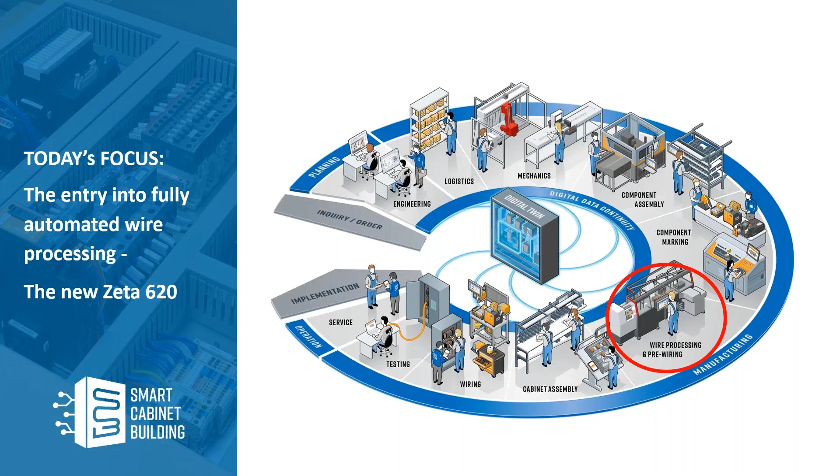In parallel, the wire processing can take place already, and afterwards the cabinet assembly will take place, including the wiring. Once finished, the whole system gets tested and either mounted into your end product or shipped to your customers. So this is the whole cycle of the Smart Cabinet Building offering, and today we will focus on the wire processing, where we have a look at the entry into the fully automated wire processing with the new Zeta 620.

So I would like to cover three topics. First, the question, why do we automate? Then the requirements for automation. And of course, main topic, introduce you to the Zeta 620 and its benefits. So why do our customers automate? There are many different reasons, and one of these might apply to you as well.

First of all, the increasing cost pressure, especially nowadays where raw material and individual parts cost more and more. Your end product will become more costly, and either you have to optimize your process to keep the cost under control, or you have to increase the cost for your customer as well. Then the demand for quality is rising. Customers expect shorter delivery times, or you just need to have short delivery times in your company to meet your production workflow.

Then typically in cabinet building, we look into small batch sizes down to lot size 1. You most commonly have last minute changes, which will show up for whatever reason. And the topic that not just hit the last 2 years, but became even worse: the lack of workers, the lack of skilled workers, to satisfy your production process. Then you may have an increasing requirement for proper and consistent documentation. And finally, the planning cycle becomes more volatile as well.

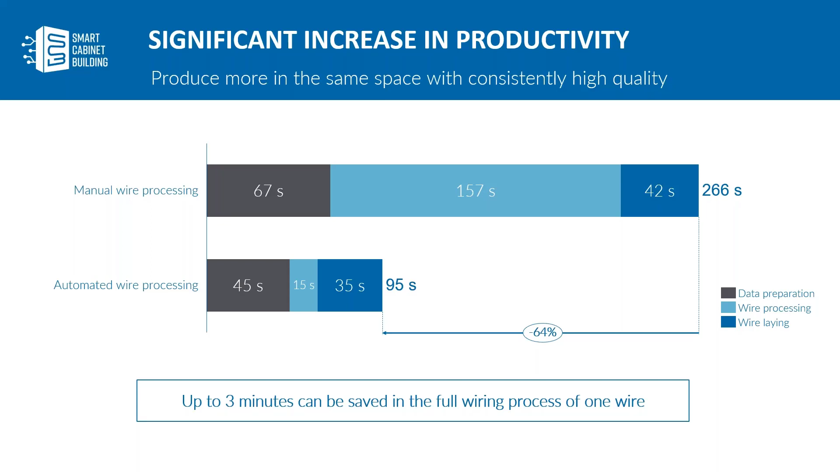So what are the requirements for automation? There are several topics. We will look especially into two main topics here. The first one is standardization of wires and terminals. If you have a wide range of different terminals, length of ferrules, etc., it will become more difficult to automate everything you need. You can reduce the variety of wire types, maybe even cross sections or colors in use. Whatever can be simplified, we can increase the automation level and therefore decrease the cost again. We'll look into such a topic afterwards again.

Second point is the digital data preparation. With a full digital twin that provides all the data you see on the right, describing the required wire production, so including the wire end process, the wire type, cross-section and color, the length of the wire, and the source and destination labeling. With this data, we can already start the automatic production.

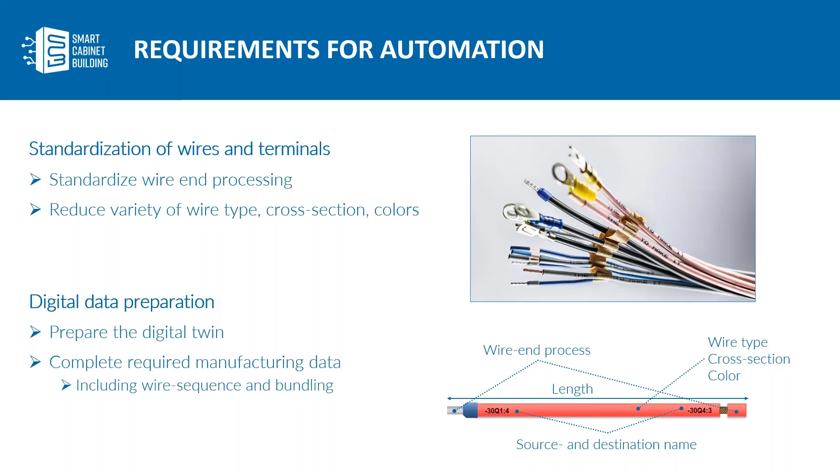This data preparation can be achieved basically with two different approaches. First of all, you use a full ECAD system that is drawing the whole cabinet in 3D and does a virtual wiring, including the evaluation of the wire length. Or a little bit simpler solution, Komax is providing a digital lean wiring software which allows you to do a virtual wiring on a 2D mechanical drawing, and with this evaluating the wire length and preparing the full set of production data. So with this data prepared, we can now look into the new Zeta 620.

With the Zeta 620, you can easily prepare complex orders with a routing optimized sequence of wires. Each wire is pre-labeled, and with this you get a high profitability even with small quantities. The machine comes in a compact and fully integrated design that most probably fits in your location as well.

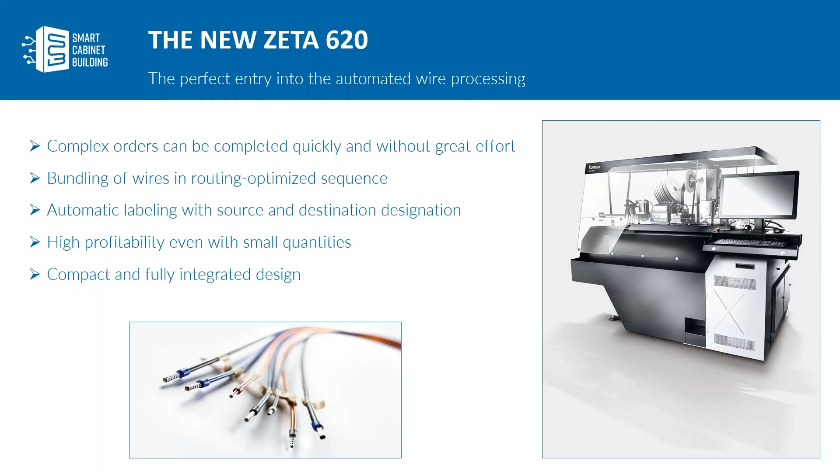The machine supports a cross-section range from 0.5 to 6 square millimeters, or AWG 20 to AWG 10. The machine can load up to 24 different wires, which are then available for processing at any time. So let's look into a few dedicated topics. First of which is the wire end processing.

The most common option in cabinet building are ferrules, where we offer modules to cover the full cross-section range from 0.5 to 6 square millimeters in a fully automatic crimp process. Second one is ultrasonic welding with a high reliability and flexibility, where we can provide welding length of 5 to 19 millimeters.

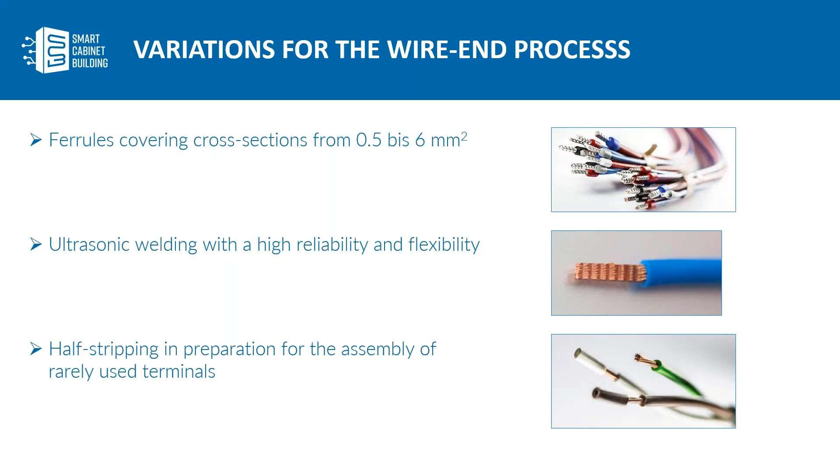And last but not least, we have a half stripping option on this machine as well. This can either be used in situations where you don't need any wire end processing at all, or if you want to crimp some rarely used terminals, like for example, a ring terminal on a ground wire. And this could then be just a manual step after the fully automatic preparation of the bundles. So these are actually the three options the machine will cover.

Another very important topic is the clear labeling of each wire with the source and destination name. This can be done either with inkjet marking with two printers, typically in white and black color for best readability, and this offers continuous printing as well, which will be very helpful, for example, when troubleshooting certain errors in your cabinet.

So to show a bit more about the machine, I would like to run a quick video which gives a good impression of how this machine will work. Please give me a second.

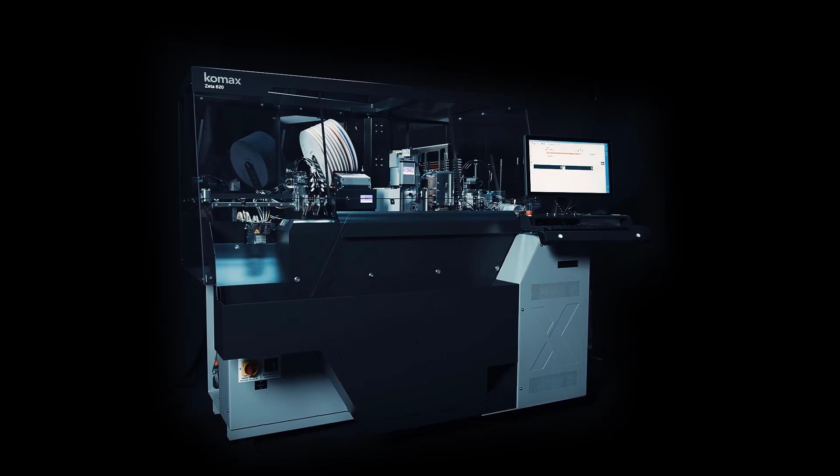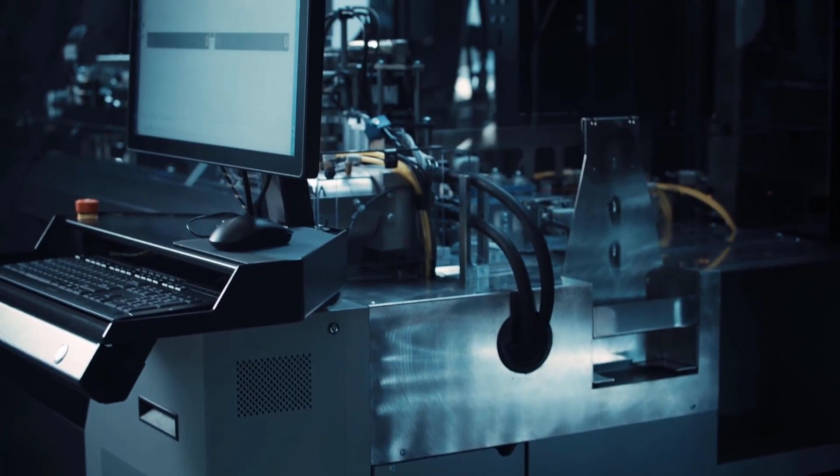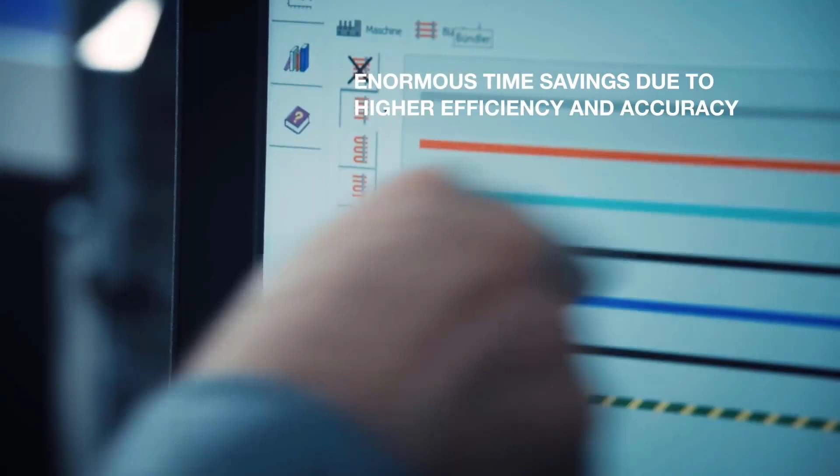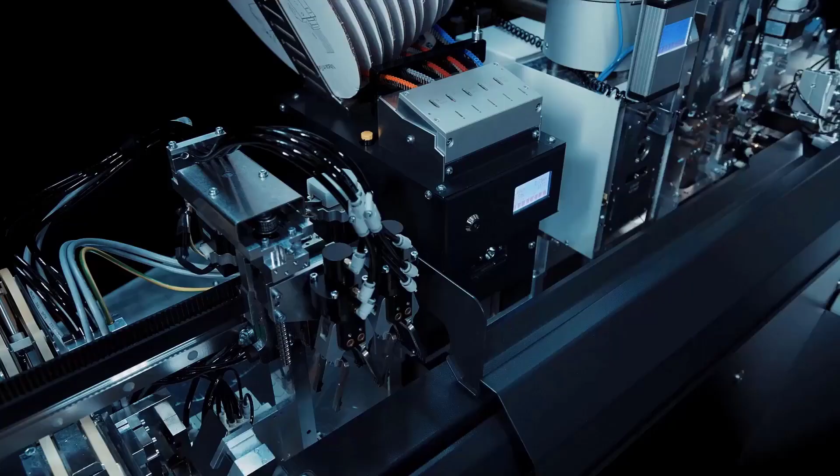So here you can see the Zeta 620 with the integrated printers. So compared to your machines, we don't need extra floor space anymore. So they are nicely integrated. The user interface itself is well known and well received by customers. It's the same as other Zeta family members provide as well. The automatic wire selector can load up to 24 wires.

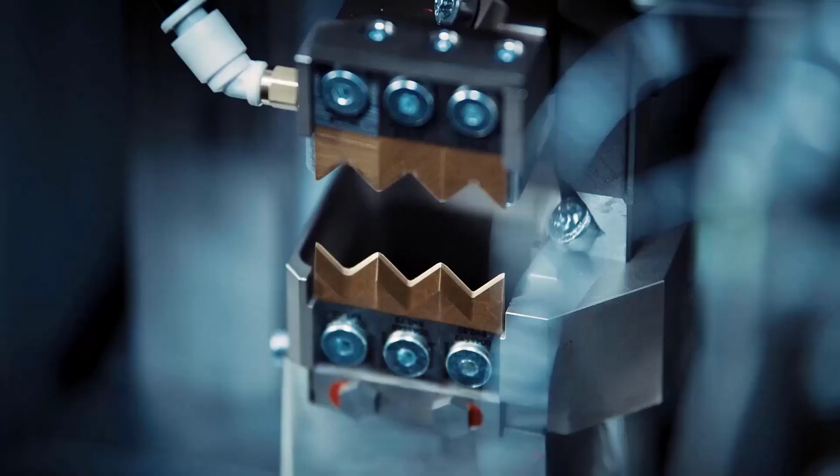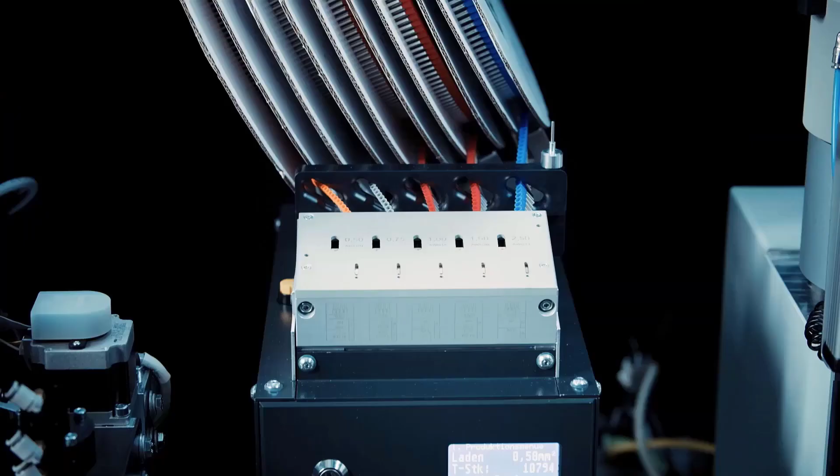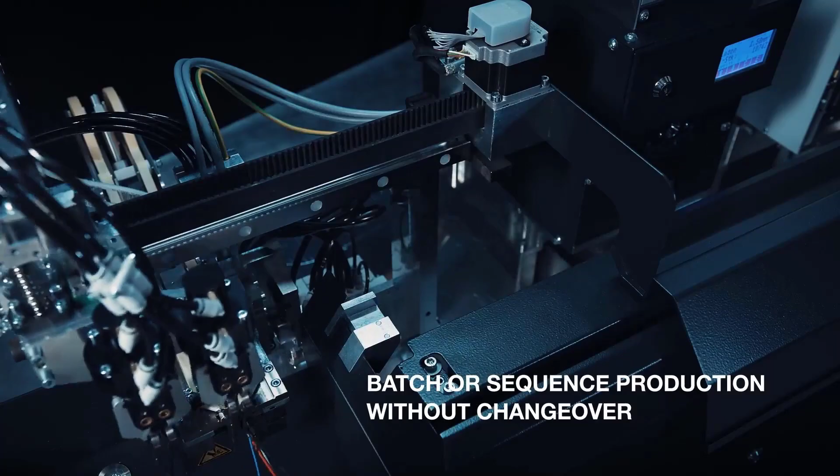After loading the wires, they are first cut and stripped. And afterwards, the automatic crimping module for ferrules will apply the required ferrule. So there are different crimp modules available. Here we have a CMF20 module and also a loose piece module.

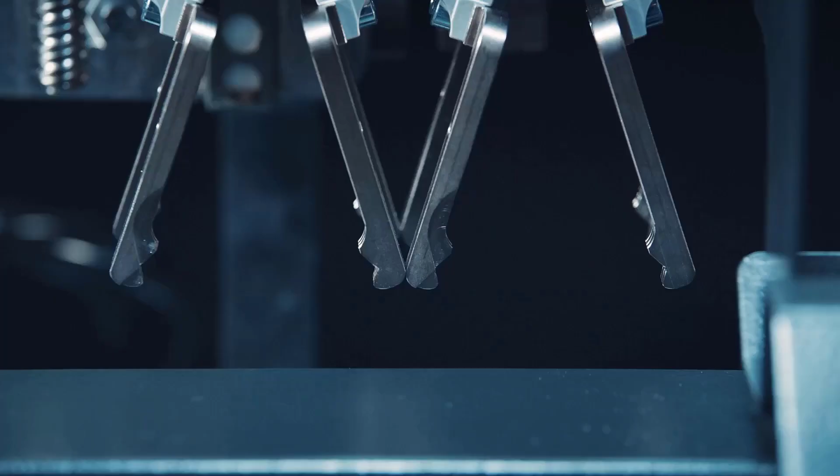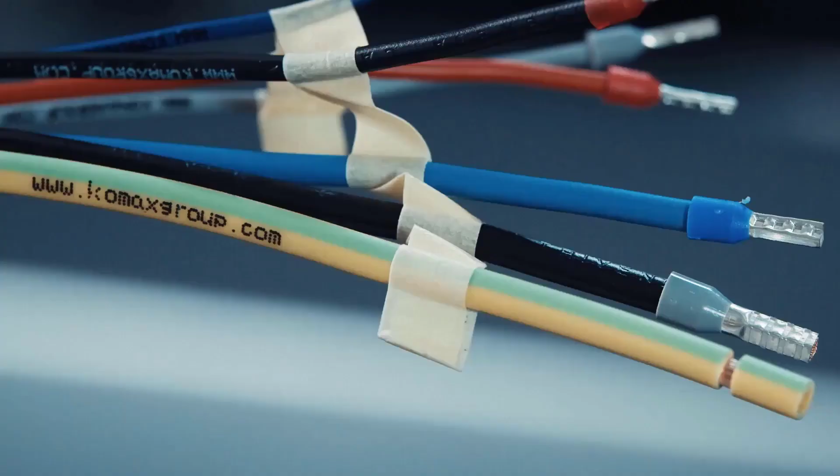In this case, for 4 square millimeter ferrules, there is one module for 6 square millimeter as well, or we offer a new module for 4 and 6 square millimeter ferrules all together. And this is the result we get out of a sequence production on the Zeta 620. So let's switch back to the presentation again.

I hope you can see the slide again. So this is now a summary of the whole Zeta product line. The Zeta 620 is the latest addition to a series which has actually been offered to customers for 20 years. There is also the Zeta 630 available, which offers 2 stations to attach different process modules.

Then the Zeta 640 offers 5 in the standard configuration, and the Zeta 650 8 stations. If this number is not sufficient yet, you can even add an extension with an additional 5 stations, so we can install up to 13 different process stations in total.

The performance varies as well. On the Zeta 620, we can do about 700 wires per hour when only stripping, and when attaching ferrules on both sides, we can produce around 360 wires. On the other machines, the number is then roughly double. As mentioned before, the Zeta 620 can load up to 24 wires, while the other machines can take up to 36 wires.

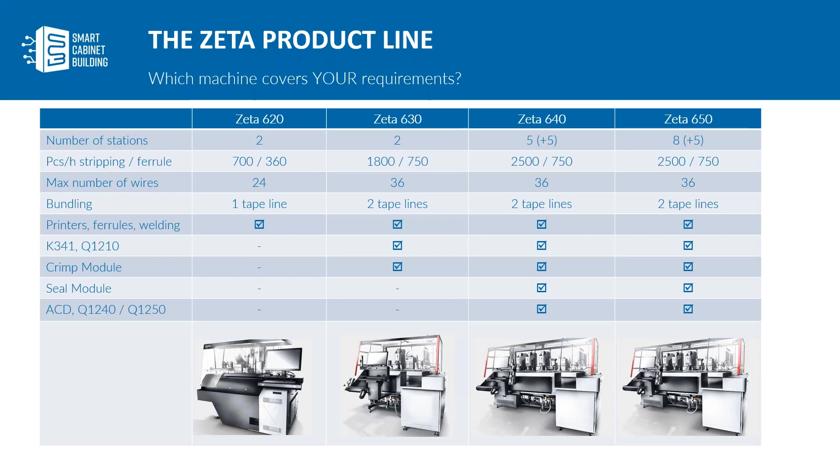But of course, Komax will always support you after you bought the machine as well. So we not only offer the equipment, we offer digital services as well. For example, for data preparation, production planning, and production optimization. We offer financial services, so you could lease the machine as well.

And of course, probably most importantly, the technical support with Komax Care, which supports optimized maintenance plans, support plans in different levels, where you can choose from a wide range to match exactly your needs. Then Komax Academy offers trainings for the machines, which is very essential to have an efficient and reliable production. Last but not least, spare parts are of course always available in case you need some wear parts to be replaced.

So we come to the summary. What are your advantages when looking into fully automated wire production? You get a significant increase in productivity, depending on your products and your current workflows. You can achieve 50% or even higher. With the preparation of the digital twin, you get complete and consistent documentation. You are cost effective even from lot size 1 upwards. You will gain continuous high quality in your products.